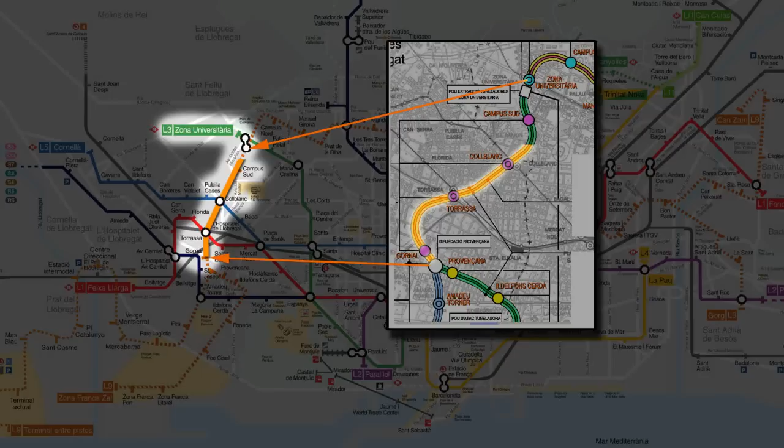The following computer animation shows the way earth pressure balance shields work, taking as an example the Herrenknecht EPB shield used for a subway construction project in Barcelona. As part of the extension of Subway Line 9, the machine S442 excavates a 3.6-kilometer-long section between the subway stations Gornal and Zona Universitaria.

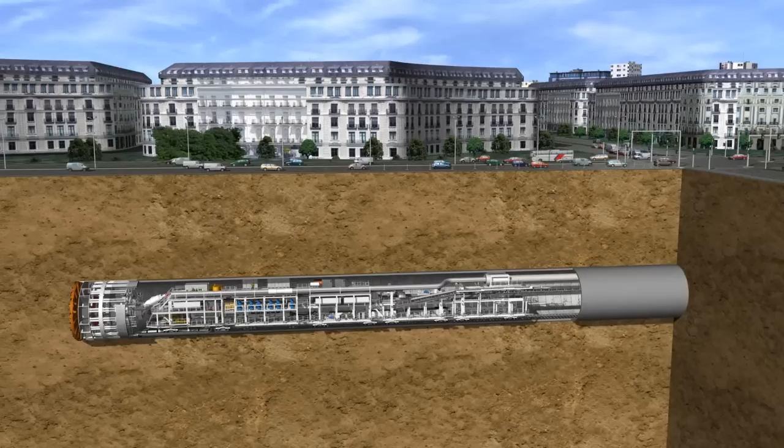The tunnel route crosses beneath Barcelona's historic city center, densely populated residential areas and roads. In order to avoid any damage to the sensitive buildings, subsidence, heave, and vibrations must be avoided at all cost. In addition, the impact on traffic above ground must remain as small as possible.

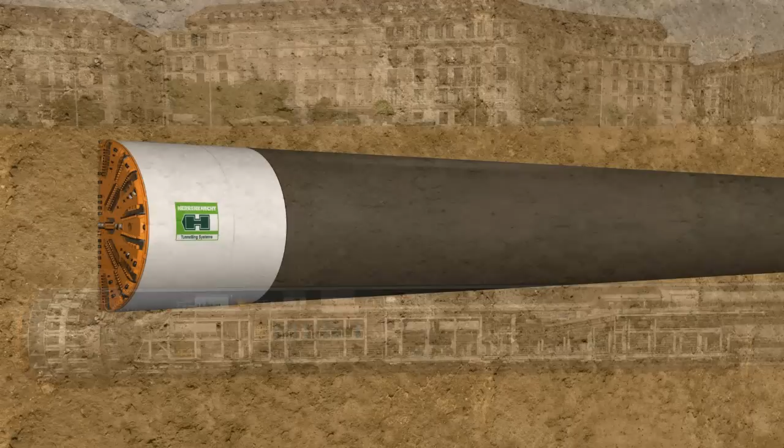The S442 is a classic EPB machine with an outer diameter of 12.06 meters and a total length of 95 meters.

With its rotating cutting wheel, the tunneling machine breaks the material from the tunnel face. The material is then transferred to the belt conveyor system in the rear of the shield via a screw conveyor, while the hydraulic cylinders press the machine forward continuously.

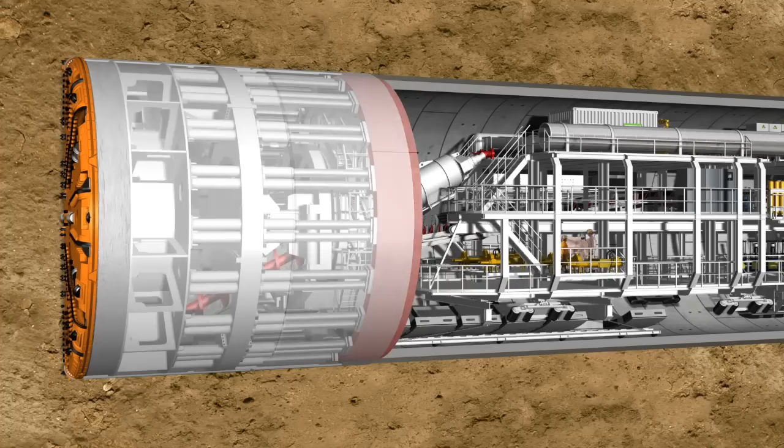The reinforced concrete segments, known as lining segments, are installed under the protection of the shield skin. When the ring building has been completed, the machine can push itself against the new tunnel ring and drill further into the soil.

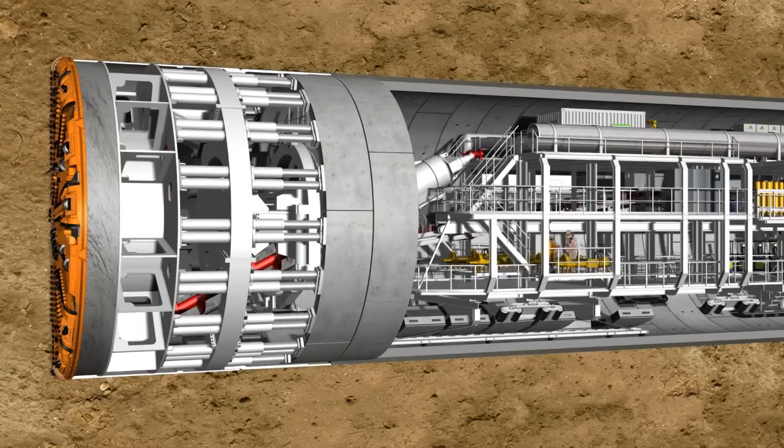The 83-meter-long backup accommodates all logistic facilities necessary for the operation of the overall system. The working method of an EPB shield is basically made up of two phases: the tunneling phase and the ring building phase.

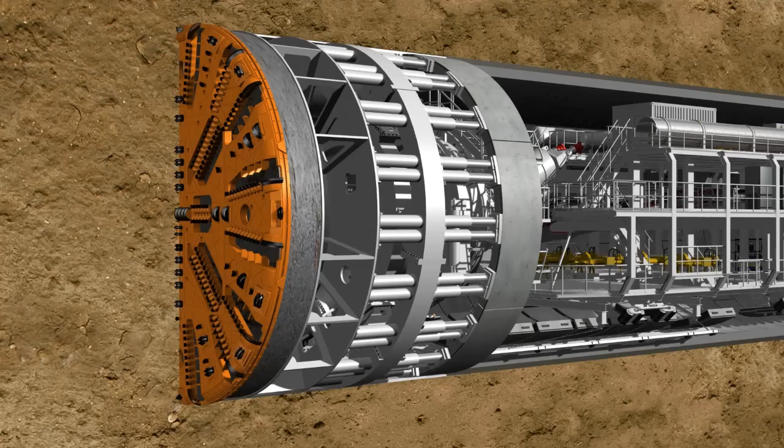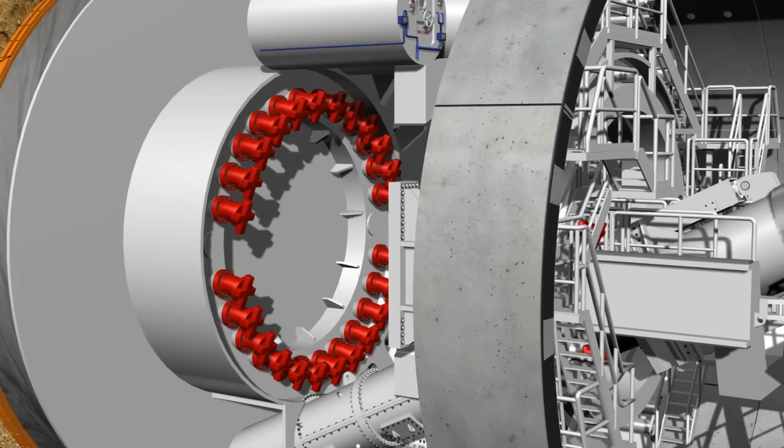During the tunneling phase, the cutting wheel, which rotates at a speed of up to 2.7 revolutions per minute, is pressed against the tunnel face with a pressure of up to 400 bar by means of hydraulic cylinders. 24 hydraulic motors drive the cutting wheel via a gear rim, developing a drilling torque of up to 38,000 kilonewton meters.

Under this high pressure, the disc cutters and cutting knives made of high-strength steel loosen the material at the tunnel face.

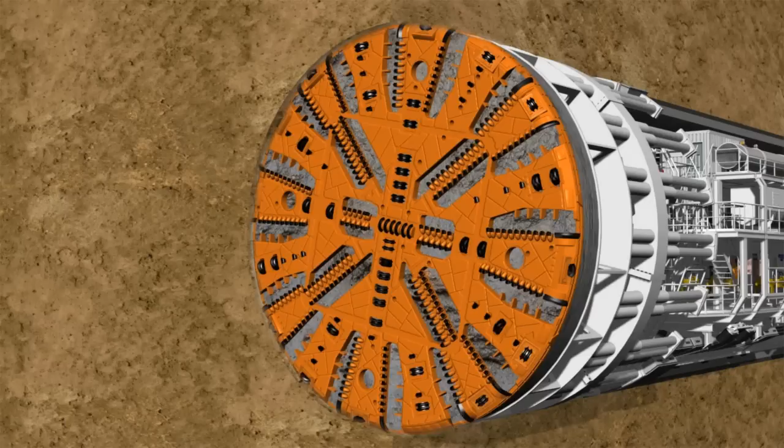If necessary, the soil can be conditioned with water, bentonite, or foam using the injection systems located on the backup. With the help of nozzles integrated into the cutting wheel, the corresponding conditioning medium is injected into the soil, which is pressed into the excavation chamber by the existing earth and groundwater pressure.

For shield tunneling in non-stable soils, a loss in stability at the tunnel face is compensated by creating a support pressure. In the case of the earth pressure balance shield, the soil which was excavated by the cutting wheel is used to support the tunnel face.

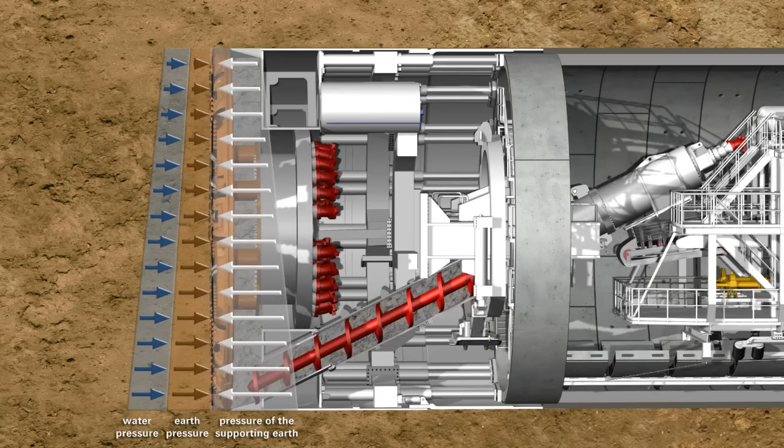In order to reach a state of equilibrium, the support pressure is transferred by the hydraulic cylinders via the bulkhead to the soil, which avoids an uncontrolled penetration.

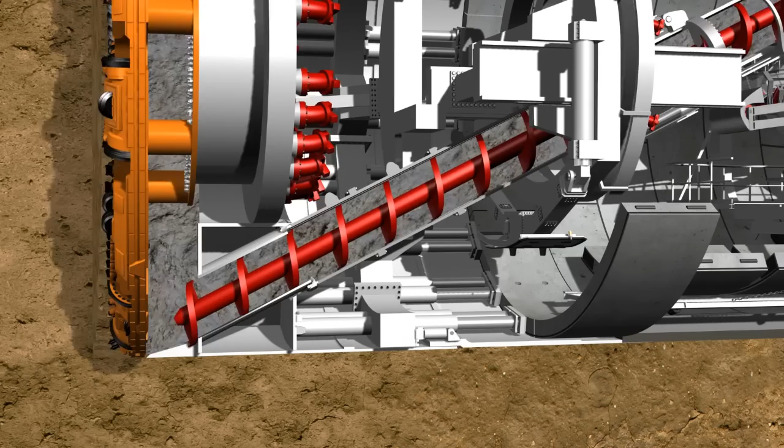The soil prepared in this way can now be transported from the invert area of the excavation chamber to a belt conveyor by a screw conveyor. The screw conveyor is driven by two hydraulic motors which have a power of up to 400 kilowatts.

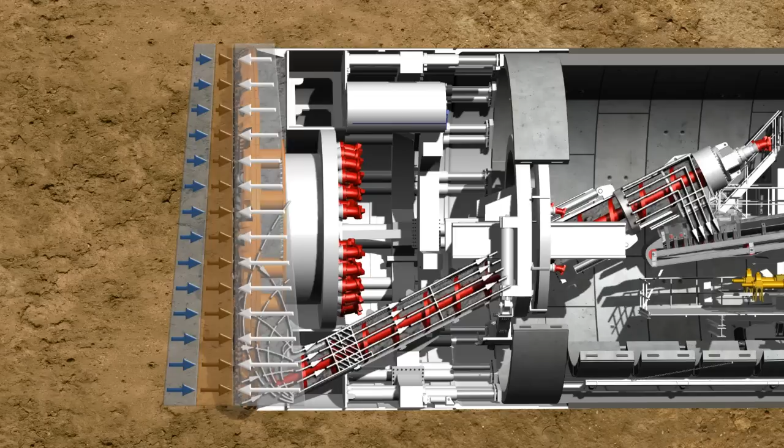The quantity of the soil taken from the excavation chamber is regulated by the screw conveyor's rotational speed, which is matched to the advance speed. The aim is to maintain a state of equilibrium between the quantity of soil removed by the screw conveyor and the quantity of soil accumulated from the shield's tunneling process. This guarantees optimum support for the tunnel face.

The system must be able to react flexibly to the permanently changing geological conditions. Therefore, the current state is continuously controlled with the help of pressure sensors, by measuring the cutting wheel torque and the screw conveyor torque, and by monitoring the excavated material.

When the tunneling phase is completed, cutting wheel and screw conveyor are stopped. Now the ring building phase starts in the shield area under atmospheric pressure conditions.

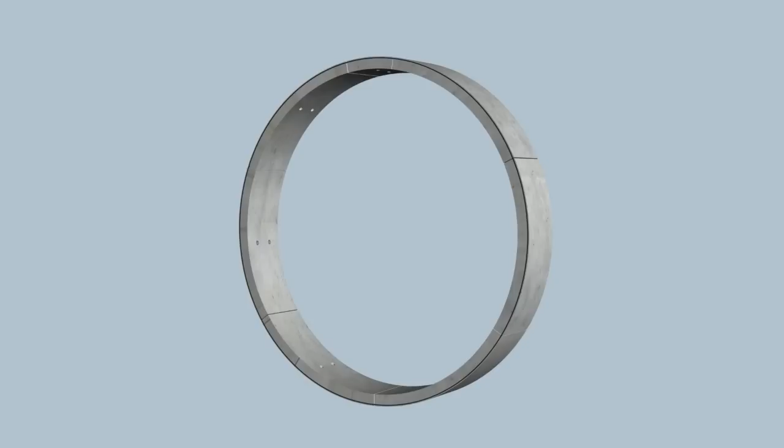A complete tunnel ring consists of several segments, called lining segments. These prefabricated reinforced concrete elements are produced with millimeter precision in a factory which is especially installed above ground for this purpose. Following quality control, they are then transported into the tunnel by mine cars.

In the front section of the backup, the lining segments are lifted individually by a special transfer crane. It lifts them onto the segment feeder which transports the elements to the front of the tunnel.

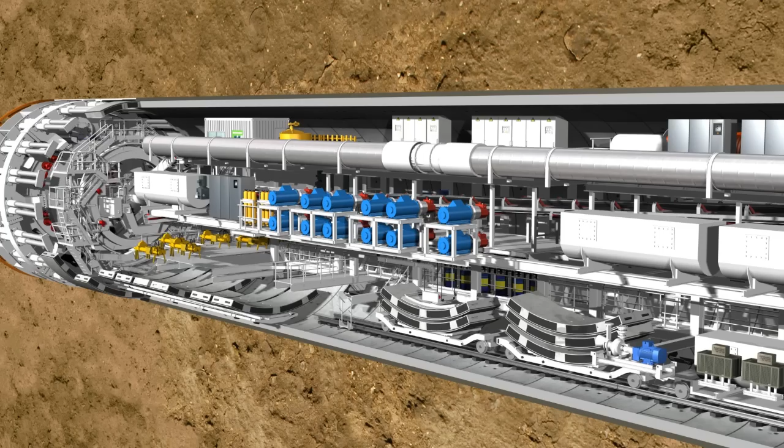Here, the heavy ring segments are picked up and positioned by a hydraulically controlled crane arm, called the erector, using vacuum plates. The erector is installed on two rails and can be moved, rotated, and telescoped.

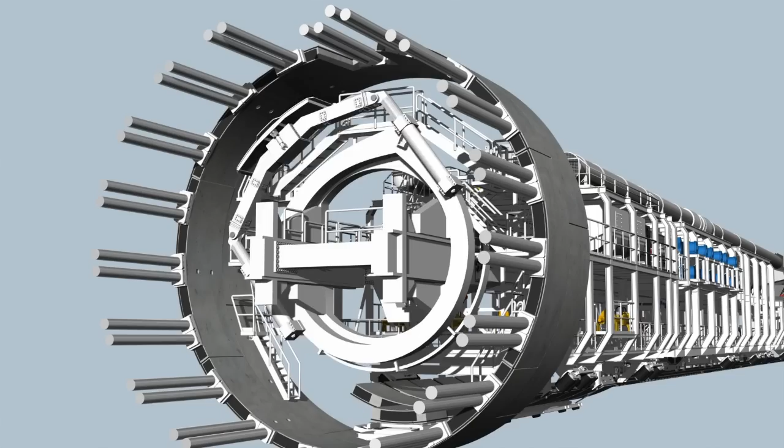Each completed tunnel ring consists of several segments, two lateral elements, and the key segment, which is installed last. The positioning of the segments always follows the same routine. The erector lifts the stone from the segment feeder.

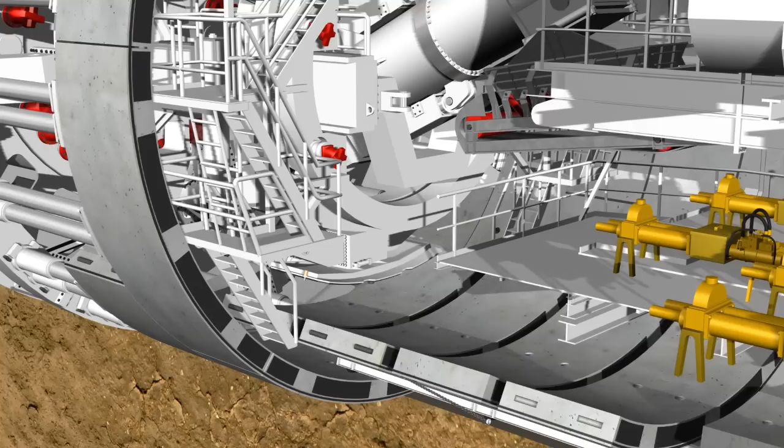The hydraulic cylinders are then retracted from the corresponding installation point. The segment is positioned precisely, holding sight contact next to the previously installed ring, using a remote control. Now the hydraulic cylinders are extended again to secure the segment in its position and to subsequently bolt it into the previous ring.

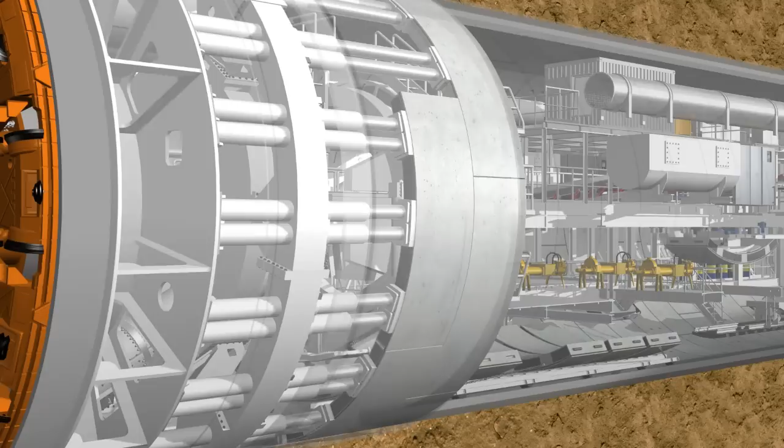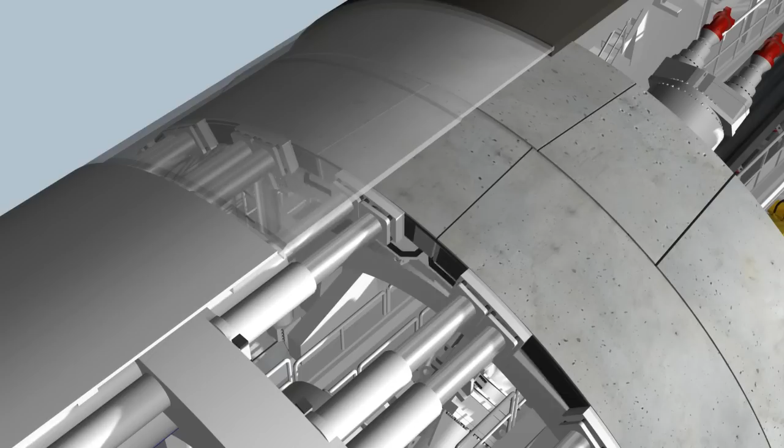During this process, machine and tunneling personnel are protected by the shield skin against the earth pressure and any possible groundwater. In this way, the lining segments are installed on each side alternately. The key segment, with its tapered sides, is slotted into position last and distributes the loads in the ring, completing the ring building. Subsequently, the next tunneling phase can start.

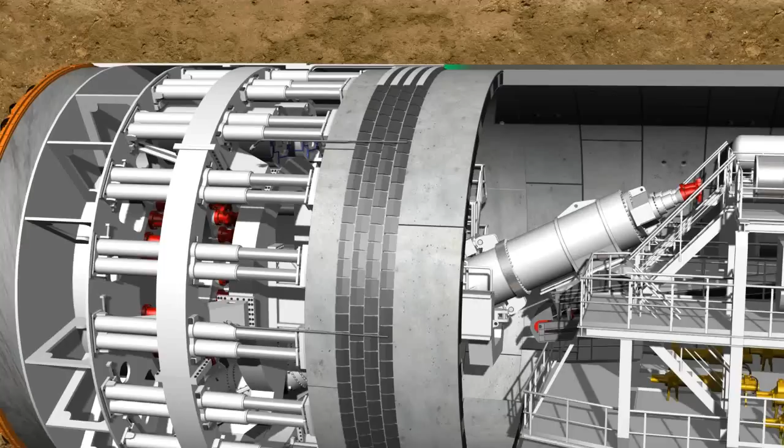The end of the shield, the so-called tailskin, is equipped with a circular tailskin sealing. This provides a seal between the steel structure of the shield machine and the segment ring. This in turn guarantees the necessary sealing between the interior working space and the exterior earth pressure.

The remaining annular gap between the outer side of the lining segments and the soil is continuously filled with grout via injection holes in the tailskin or in the lining segment in order to provide a bed for the tunnel tube and to stabilize it.

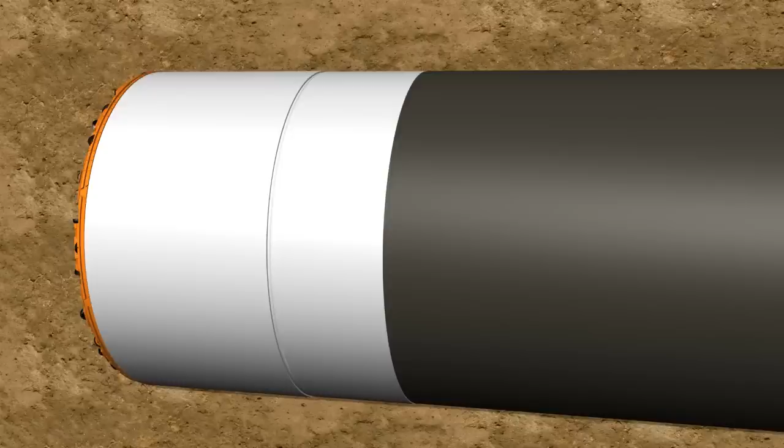Each individual tunnel ring is constructed in a slightly conical form. This means that curves can be constructed along the tunnel route by changing the installation position.

A time-lapse clearly shows the two working phases of the TBM. The tunneling phase and the ring building phase alternate continuously. In this way, the tunnel grows ring by ring.

Under optimum conditions, up to 350 meters of tunnel can be constructed in one week. This includes the removal of up to 40,000 cubic meters of excavated material and the installation of far more than 1,000 lining segments.

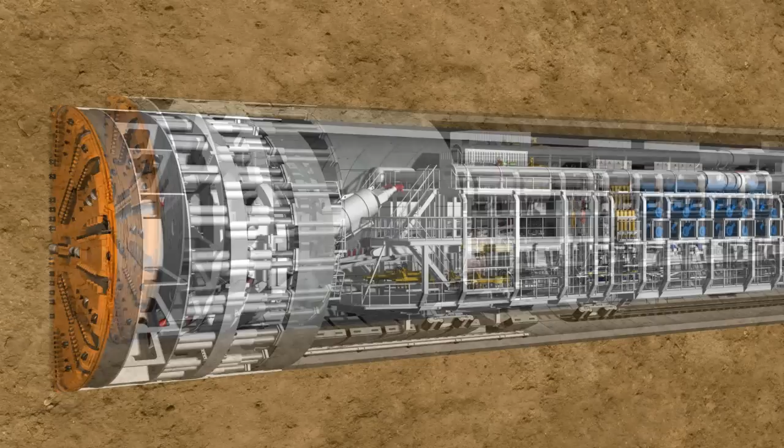Complex logistics solutions are required to deal with such quantities of material. The 83-meter-long backup of the S442 tunnel boring machine accommodates all the facilities required. With each advance movement of the shield skin, the backup is pulled behind on wheel sets, which brace against the tunnel wall.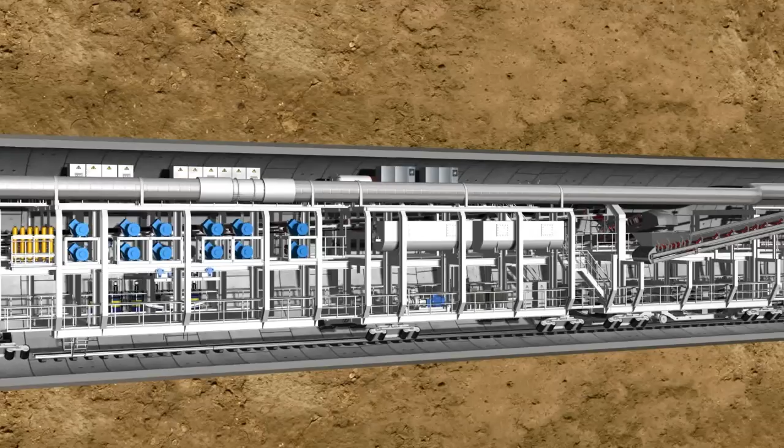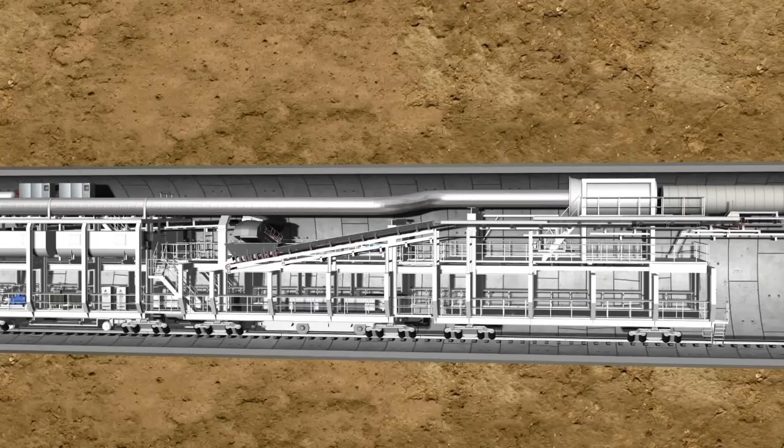Among other things, the steel structure accommodates hydraulic power units, pumps, switch cabinets, ventilation systems, laser instrumentation, and storage containers for soil. In addition, logistic solutions for the delivery of the lining segments and the removal of the excavated material are located here.

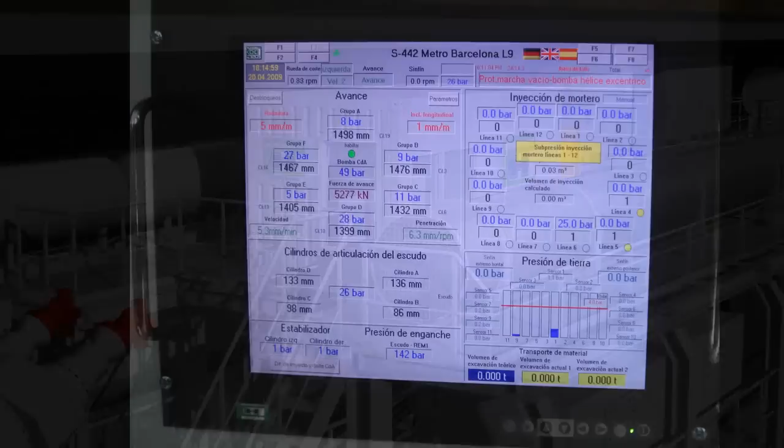All important data and up-to-date tunneling parameters are gathered together in the central control cabin. There, they are visualized on monitors and made available to the machine operator. The operator can monitor the largely automated process and intervene if necessary.

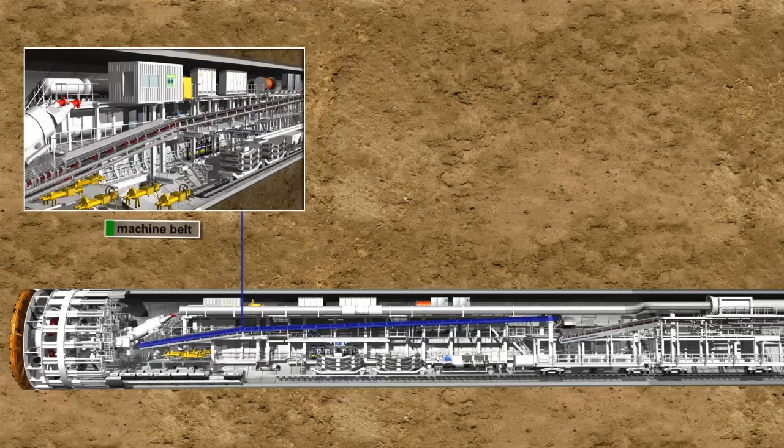In the case of EPB machines, the excavated material is mostly removed by belt conveyors. The core components of such systems are the machine belt, the cross belt, and the tunnel belt, which can measure up to 30 kilometers. The machine belt and the cross belt are two separate short conveyors which are permanently installed on the tunnel boring machine.

The tunnel belt takes up the excavated material from the cross belt in the backup area and transports it along the total tunnel section to the launch shaft.

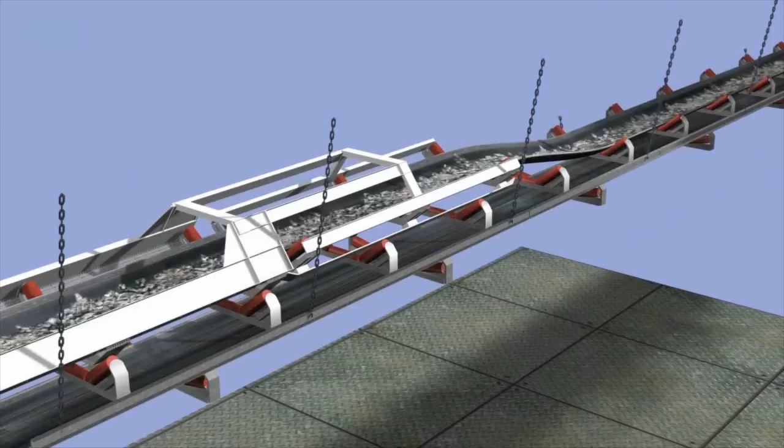The front section of the tunnel belt is also permanently mounted on the backup. The rear part is statically mounted on the tunnel wall and is continuously extended during the ring building phases to match the growing conveyor distance.

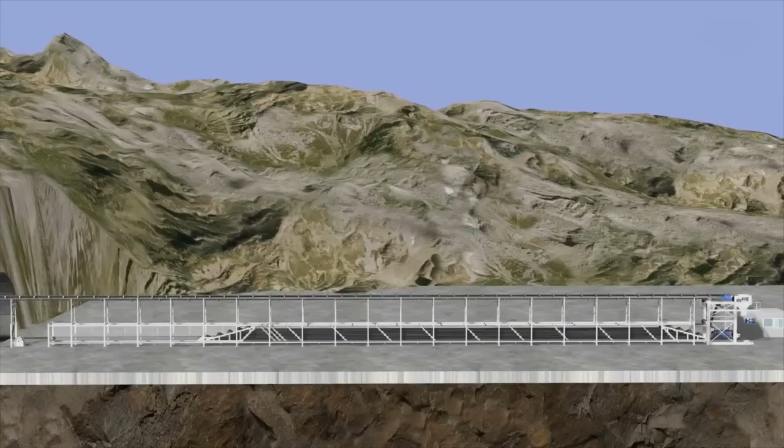In order to compensate for the increase in the conveying distance, a special belt storage system is installed at the launch shaft, which releases the extension of the tunnel belt as required.

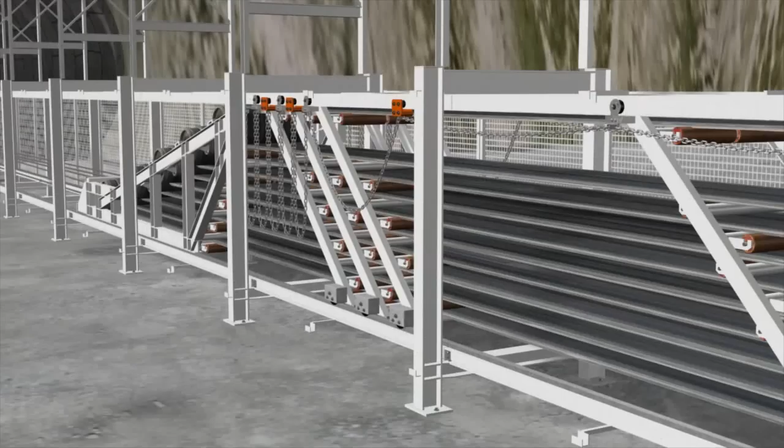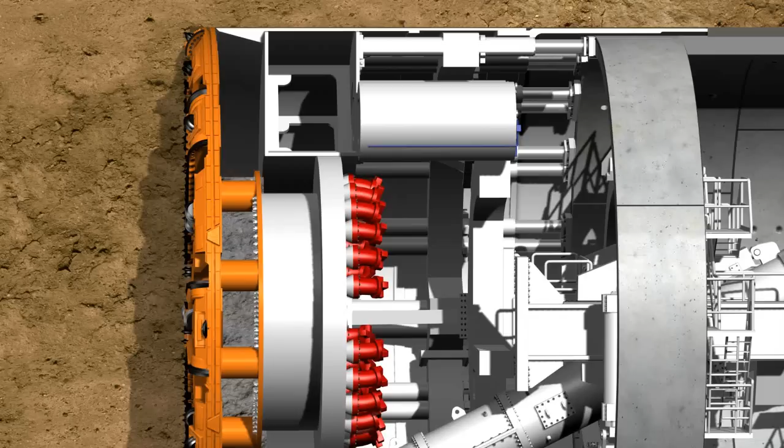If a tool must be replaced, the excavation chamber is partially emptied. At the same time, the cavity in the chamber is supplied with compressed air, if necessary, to stabilize the tunnel face. Then the excavation chamber can be accessed through a manlock to carry out maintenance work or to replace tools.

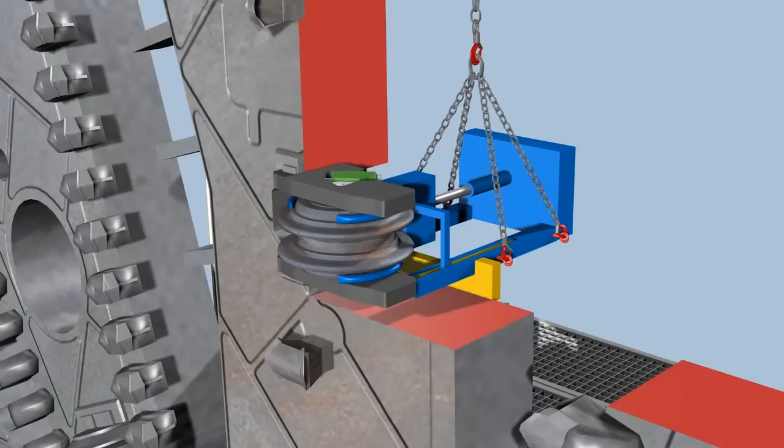A disc cutter is exchanged in three steps. Initially, the quick-release fasteners are loosened. Subsequently, the disc cutter is pulled out of its support with a special tool and, in a third step, replaced by a new one.

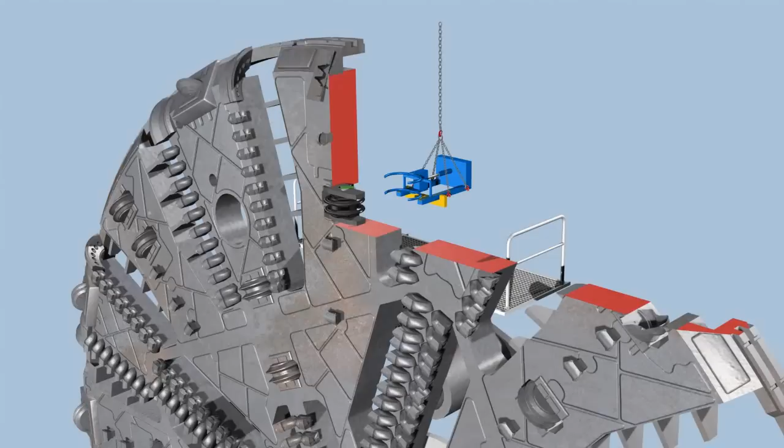Traditionally, earth pressure balance shields made by Herrenknecht are in their element in cohesive soils consisting of clay and silt with low water permeability. Moreover, loose soils consisting of sand and gravel and unstable rock can also be successfully mastered with the EPB technology.